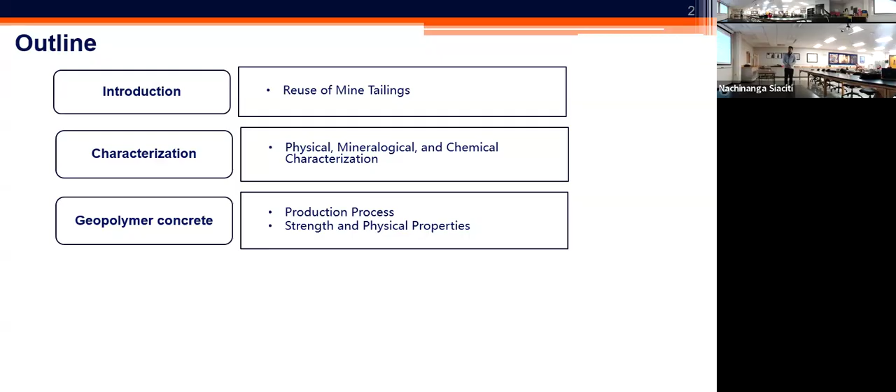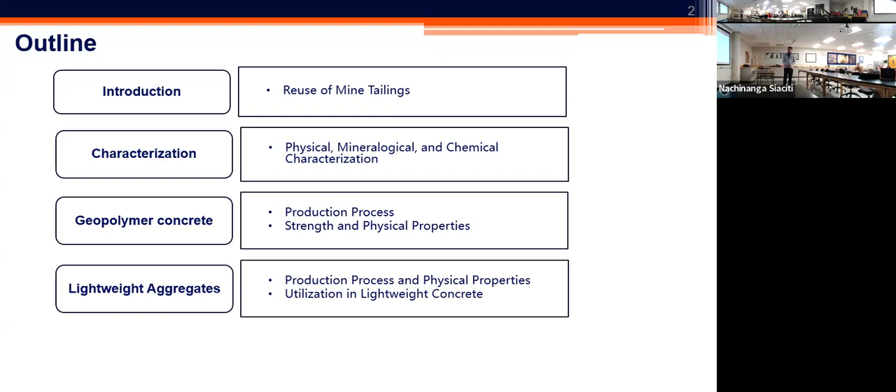And then I would like to introduce the three different techniques, mainly about the geopolymer brick. Related to that, we're going to look into the production process and the strength and physical properties of the geopolymer bricks. Then later, we're going to look into a similar process, but for a different product. We will look into the lightweight aggregate, the production process for that, and some characteristics of the aggregate, and also their use and performance in terms of the concrete made of those aggregates. And lastly, we can look into the ceramics.

Sorry, I'm told that only one button on this remote works, and it's just to advance it.

So this is a beautiful picture of Antamina mine, which is located in Peru, one of the major providers and producers of copper and zinc. This picture is a really good reminder for all of us about the importance of mining and the fact that mining engineering plays a major role in our life by providing the minerals and materials that we need for infrastructure, energy, as well as technology development.

It's projected that the need for minerals and materials will double within the next 30 years. So you can only imagine that the waste of the mining operation also will drastically increase. That waste of the mining operation, as a leftover of the operation when the material of value has been feasibly and economically recovered, is called mine tailings. And it's projected that we will even be looking at beyond 10 to 14 billion tons of mine tailings to be deposited every year. So the quantities of mine tailings are of significance.

Typically, we deposit mine tailings in two forms. What you see on the left side is the dry stacking after the water has been removed. And what you see on the right side is the slurry deposition in the impoundment lakes, where the tailings in the form of slurry get deposited behind the dams, and then they go through this process of retention. As the material is being deposited, the dam also rises. So you have this continuous building of the impoundment lake and the dam that retains the mine tailings.

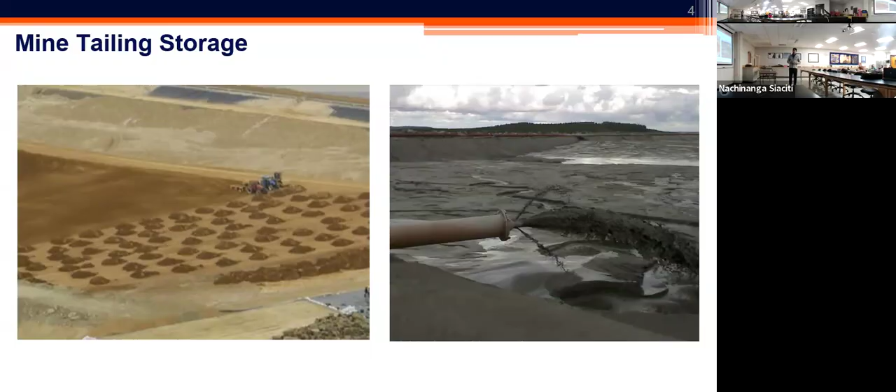Now, the handling and storage of mine tailings has several environmental, ecological, and economical issues associated with it. Some examples of these issues are shown here. What you see on the left side is a catastrophic failure of the dam that happened in 2019 in Brazil that resulted in the unfortunate deaths of 270 people and dislocation of millions of tons of tailings.

And what you see on the right side are also examples of the air pollution as well as the contamination of the water that would be associated with the deposition of the mine tailings.

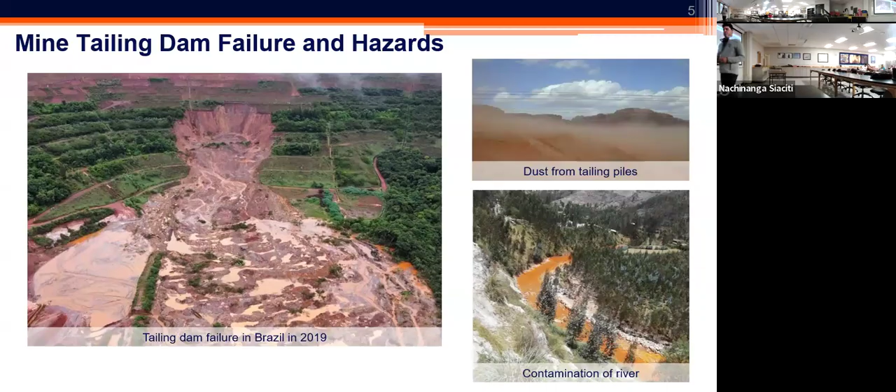So here also you can see examples, a statistical evaluation of the records of the different dam failures that have been recorded related to the tailing dams. So unfortunately, tailing dams run about 2 orders of magnitude higher risk for failure compared to other types of water dams that we have been able to work and engineer over the years.

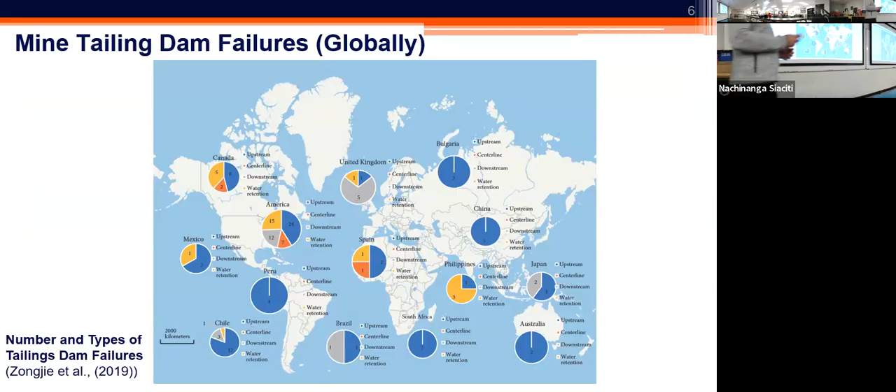So if we think of the mine tailings from the perspective of the waste and look at the waste hierarchy, obviously, often the easiest solution for us, which is also the least favorable, is disposition and disposal of the mine tailings. And at the top of this pyramid, you can think of the reuse as the most favorable option.

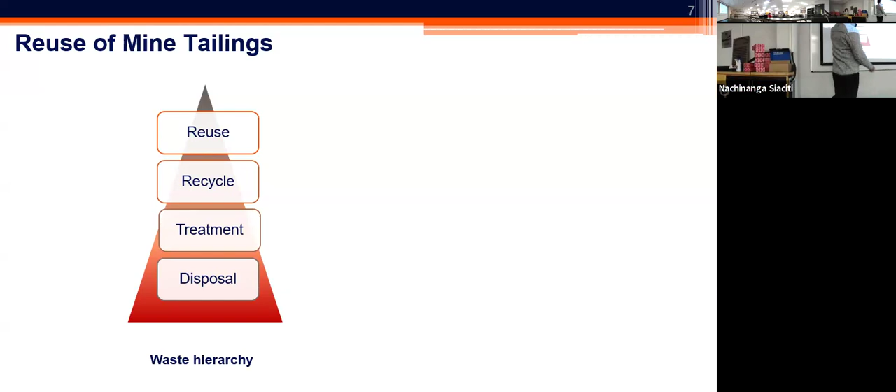And we can visualize and envision many different benefits associated with the reuse of the mine tailings. Starting at the top, we have the creation of sustainable types of materials that would then allow us to reduce the need for the use of natural resources, limiting the amount of waste production, and hopefully associated with that, we can promote additional innovation and improve the teaching and research capacities in our programs. And hopefully at the end, we can promote different industries related to the production of these construction materials.

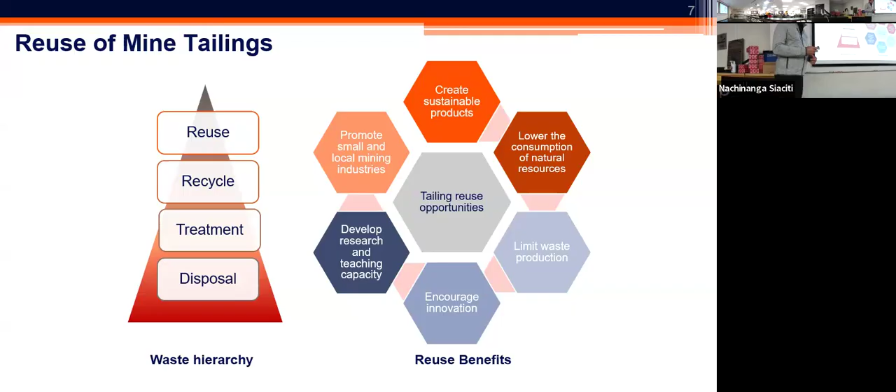Oops, let's go back to previous slide.

So as a geotech engineer, material engineer, we have some appreciation for some of the materials that come with the mine tailings. As a mining engineer, maybe the materials are considered as waste of lesser value, but if we look into the materials, they often contain higher amounts of aluminosilicates, aluminum oxide and silicon dioxide. So that essentially is a type of material that we would be looking for. So from the perspective of a material engineer, the material might have some value.

And over the last, I would say 5-6 years, in our research group, we have focused on production of different types of construction materials, mainly from mine tailings, in the capacity of geopolymer bricks, lightweight aggregates, as well as ceramics.

So also, since the start of my career at Mines, we have been focusing on evaluation of the behavior of geomaterials. So knowing a little bit about how the materials behave, how they fail, how they fracture, I feel quite comfortable and optimistic that at some point we would have larger scale application of these materials, as long as we can resolve the issues with the scaling and the higher capacity processing of these mine tailings.

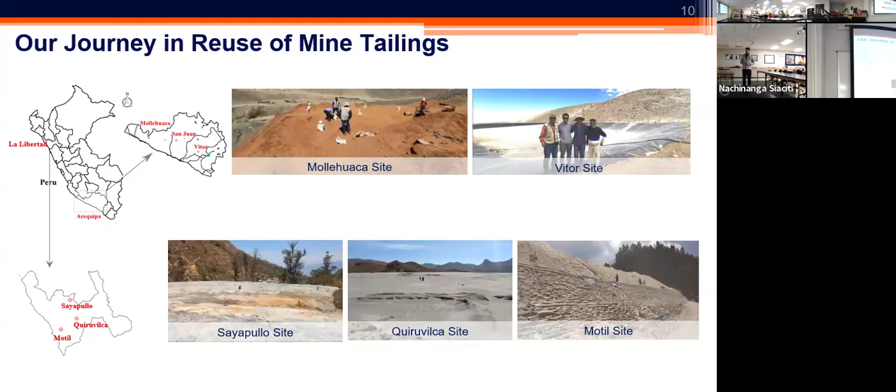So for that, we need to look into the samples. These are some images of the samples that are shown here with the gradation that we have. So gradation reveals essentially the percent finer versus the different particle sizes for these materials. One of the key sieve sizes that we like to always have a good understanding of the percent passing is sieve size 200, with a size of 75 micron.

So that essentially tells us, out of the entire assembly of the grains, how much of it is considered as technically the fines, that is the combination of the silt and clay, and how much of it is potentially sand and even larger types of grains.

So when you look at the gradation evaluation for these samples, you can realize that these have somewhere like 40 to 60% passing of the sieve number 200. So if I can use the laser option here, hopefully. Yeah, so sieve number 200 has the opening size of 75 microns. So you see that we have 40 to 60% passing of the tailings from that sieve size.

But if you look also closely at the portion of the material with the size smaller than 2 microns, which is typically considered for the clay, we don't really have too much of the clay minerals within the material. So the takeaway here is that in terms of the gradation evaluation, most of these tailings that we had the chance to work with are considered as silty soil type material, sometimes with some amount of clay, sometimes with some amount of sand, but these materials were primarily silty type of materials that we work with.

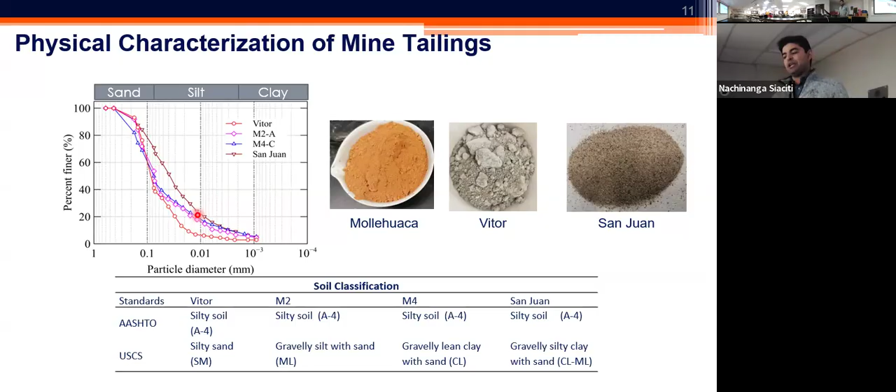In terms of evaluation of the mineralogical composition, there is a well-accepted practice where you can use the X-ray device, and by subjecting these materials to millions of X-ray patterns and looking at the reflection pattern, you can identify some of the key types of the mineralogical composition for these materials. So here, the fact that we do see a lot of peaks in the X-ray pattern can remind us that the materials are highly crystalline, and they consist of some primary types of crystalline structures.

In these samples that we had a chance to work with, we identified quartz as the dominant type of crystal. In addition to that, we also had albite and muscovite that were rich sources of aluminum oxide as well as silicon dioxide.

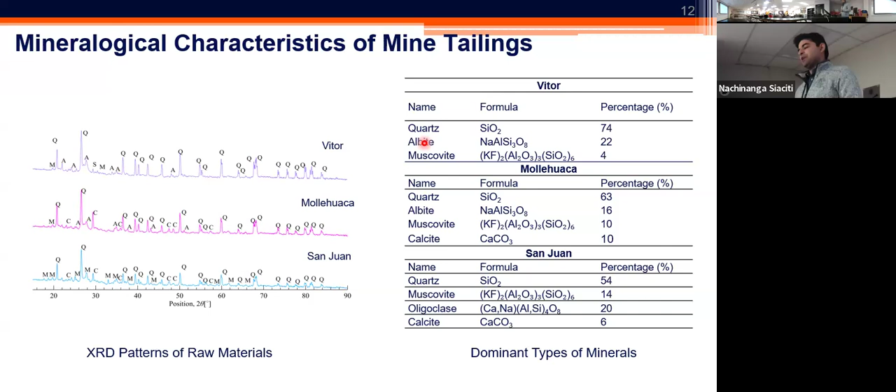In terms of the elemental evaluation, you also can quickly reveal the elemental composition by doing basic scanning electron microscope imaging with EDS. So this would not only reveal the morphology of the grains, but also the surface-based elemental composition of these types of tailings. So in the tailing samples that we had a chance to work with, we often saw that we commonly had silicon, aluminum, and iron as the dominant types of elements that were available.

So some of the takeaways so far in terms of the evaluation has been that silicon, aluminum, and iron are the 3 dominant types of elements within these tailing materials. And often you have some favorable ratio of silicon to aluminum. In fact, in these tailing samples that we had a chance to work with, the tailings were rich in aluminosilicates, and the silicon to aluminum ratio was ranging from 2 to 3.

That often is a good metric, a good predictor of the performance for geopolymerization and the success of the geopolymerization. But that doesn't necessarily mean that we always will be lucky in terms of having a good ratio of silicon to aluminum in the tailings as collected and in their raw form.

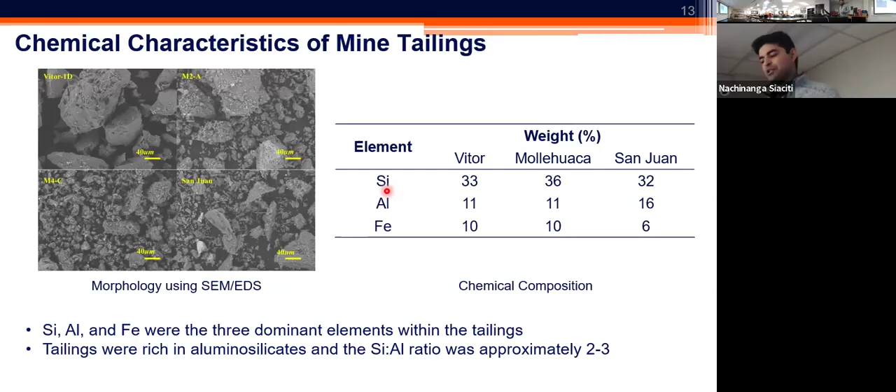So next, I would like to also show a typical evaluation of the elemental composition for some of these tailings. If we consult with the Department of Energy's designation for critical minerals and materials, we often find that from the elemental evaluation, we have some traces of those critical minerals and materials present in these tailings. So again, while being considered as waste material, we often have some traces of those materials that can essentially open up additional venues and opportunities for further extraction of value-added minerals.

But in the context of the work that we are doing, we are technically ignoring the presence of those critical minerals and materials, and we are really hoping to do something with the true waste, which in this case is the typical elemental compositions of silicon, aluminum, and iron, as you can see being dominantly present in the evaluation of the elements available within the tailings. So again, silicon, aluminum, and iron happen to be the dominant types of elements that are available.

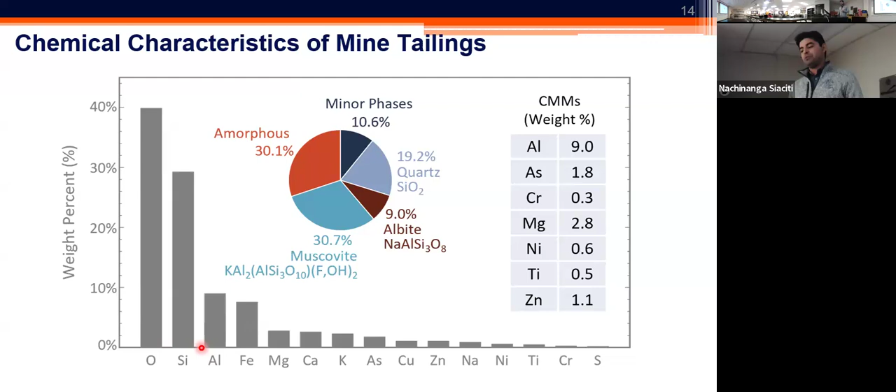So now let's look into some of the processes and the steps that are needed for the conversion of these types of mine tailings to value-added materials. So the first technique that I would like to discuss and present is geopolymer brick or geopolymer concrete production. So before I dive into the actual process, I'd like to introduce what geopolymerization means.

So we need to kind of put a little bit of a chemistry hat on so we can go through this, but I try to simplify this process. So the geopolymerization process involves the use of the precursor or the feedstock, obviously in our case the mine tailing, as material is subjected to fairly high pH environments, an alkali-rich environment, usually with exposure to solutions like sodium silicate and sodium hydroxide and the mixture of the two, you can facilitate the release of more reactive aluminum

and silicon species. Depending on the ratio of silicon to aluminum, those released species can participate in the formation of the tetrahedral units. Whether you naturally have the proper range that can immediately produce those ideal units, or you engineer the system by providing additional sources of silicon and aluminum, it is fairly easy to target different types of connections of the silicon and aluminum species.

We usually like to have a silicon to aluminum ratio of 3 and higher for the production of geopolymers. There is a trend that when you achieve those levels, the material not only will be stronger, but also more durable. So we usually favor that specific ratio. These materials then connect to each other in terms of the silicon particles, with some aluminum bonded to them, and they form monomers, connect further together, form oligomers, and then these oligomers go through the polycondensation reaction

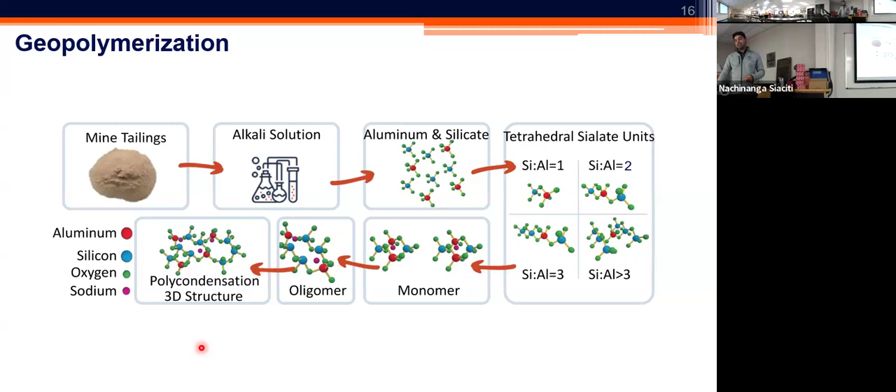So while this graph is a little bit complex and the process may look like many steps are involved, in reality, the process of making a geopolymer brick is not really any harder than baking a cake. If you think about the cake, you need flour and water to mix together and form some sort of a paste, and we do exactly the same thing. So we have the mine tailings. Sometimes you need to sieve them or grind them depending on their condition.

Then the process involves mixing the mine tailings in the solution of sodium hydroxide. Upon mixing, you come up with a mixture that can be cast inside the form with different levels of applied pressure. This material then forms these solids, which are initially deformable, but upon exposure to slightly elevated temperatures ranging from 40 to 70 degrees Celsius, you can facilitate the hardening of these bricks, which results in the formation of the geopolymers.

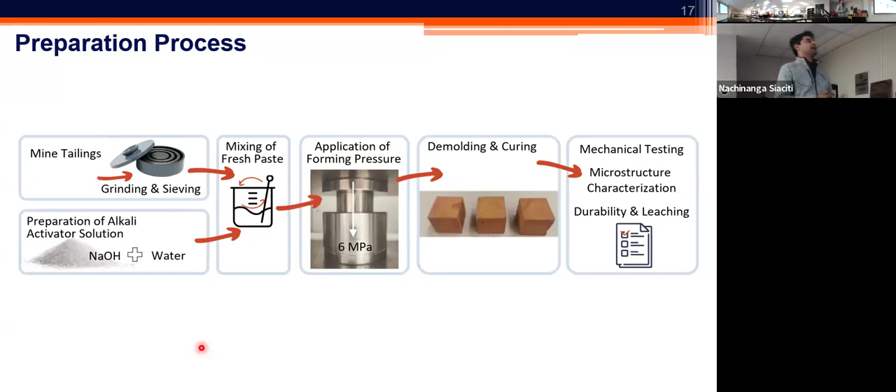Then you can proceed with the evaluation of different characteristics, including mechanical behavior, microstructure, durability and leaching performance. So like I said, geopolymerization in the laboratory, at least on the benchtop scale, is fairly straightforward and well documented. So what do we do with these bricks? The first thing is to evaluate the compressive strength. What you see in this picture is compression testing, where these bricks are placed between the platens and subjected to uniaxial compression, and we document their performance.

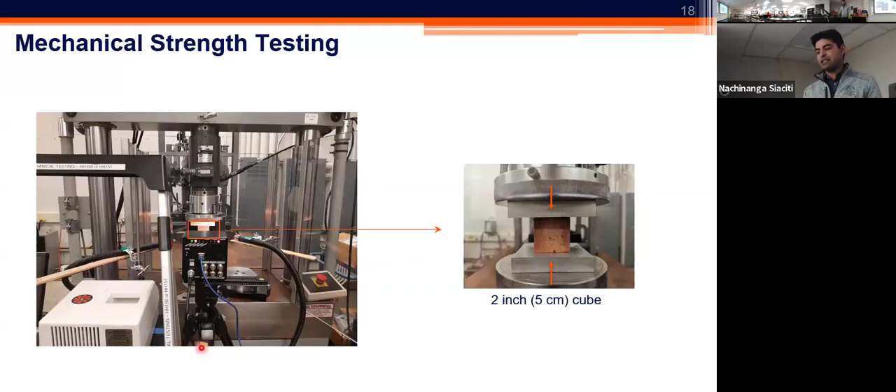We found that the strength achieved is highly linked to the molar concentration of the activator, in this case the sodium hydroxide activator. What you see here is a typical trend: with an increase in molar concentration, we often see an increase in compressive strength. The strength can be as high as, as shown here, 4,500 PSI or 30 MPa. Right now in our laboratory, we are seeing strength levels almost 3 times these values. But the success highly depends on the mine tailings and the kind of aluminum silicate species available.

But what if we geopolymerize the material with an insufficient molar concentration or chemical type of activator? If we do that, as shown here, we not only get lower strength, but the mine tailings remain in their original form. So when the sample breaks, you see those powderized mine tailings still there. But with sufficient geopolymerization, the material no longer looks like the original raw form. In fact, you start to see a concrete, brittle-like material, visible in these images.

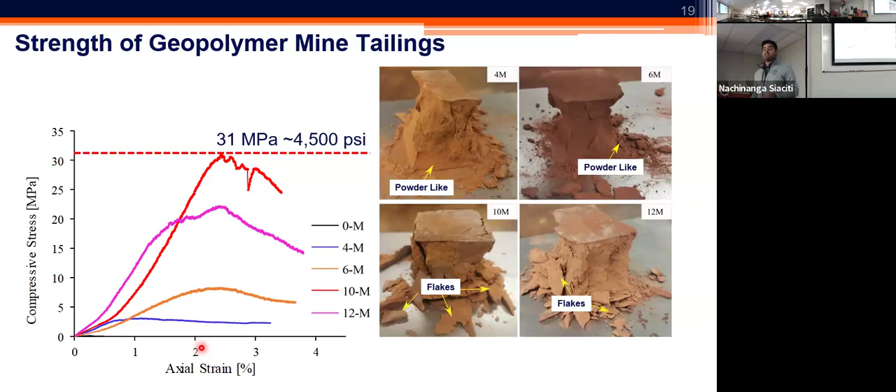So the next step in terms of the evaluation has been to see if we have this consistency in terms of the behavior for this material. So we did a lot of testing for many of these mine tailings and realized that the strength that we were getting was not sufficient. So then we went back and looked at the elemental composition, realizing that in some cases the silicon to aluminum ratio was not necessarily favorable.

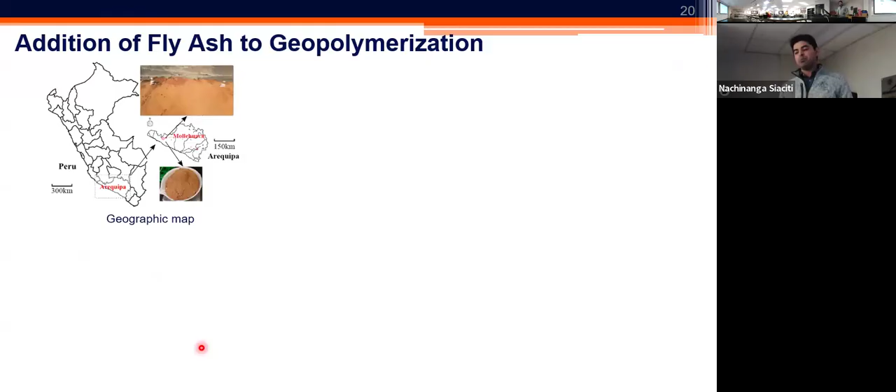So by simple mixing of the solid content of the mine tailings and the fly ash and repeating the process, you would have an opportunity to produce new geopolymers that hopefully would have some improved performance and characteristics compared to the tailing-only based geopolymers.

So we did that. We evaluated the mixture of the tailings and the fly ash in different percentages of addition of fly ash. And I think we went up to 20% addition of fly ash while still maintaining that high percentage utilization rate of the mine tailings. So with the 20% fly ash addition, we had 80% of the tailings that were used in that production process.

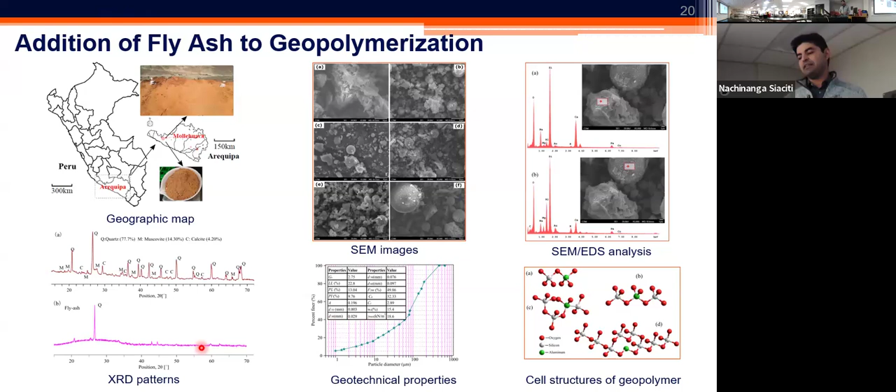And by the way, I should have mentioned that the curing process is usually 1 week long. So we put the samples in the oven, first at 40 degrees Celsius, followed by about another 7 days of curing at 70 degrees Celsius. So that's what we did for these steps that are shown here.

So one can argue that, well, if you get 15 MPa of compressive strength, that's probably insufficient. But as long as you can hit consistently 20 MPa and higher, ideally higher, then your geopolymerization has been successful for the purpose of the brick manufacturing.

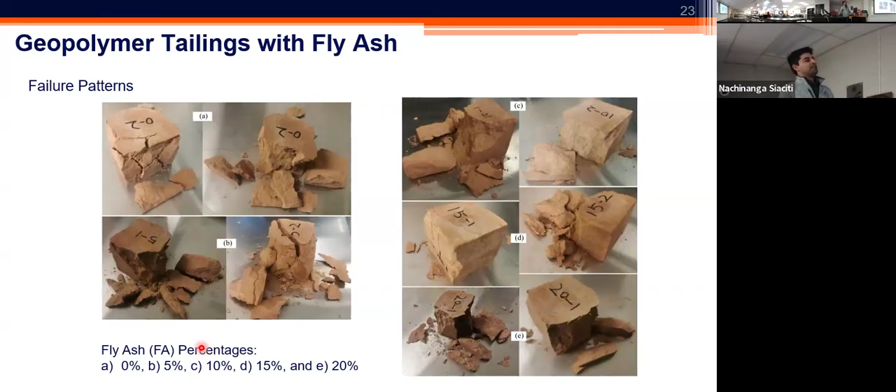And then we looked into the process as to why the additional presence of the fly ash, let's say the 20%, didn't really make much improvement in the properties. And we realized that as we exceed the 15% fly ash, any additional amount of fly ash just simply remains inert and intact and untouched, and does not necessarily contribute or participate in the geopolymerization reaction. So any amount of the unreactive content even from the fly ash can necessarily be a bad thing, maybe because of the fact that you are incorporating fly ash as a commercially available type material.

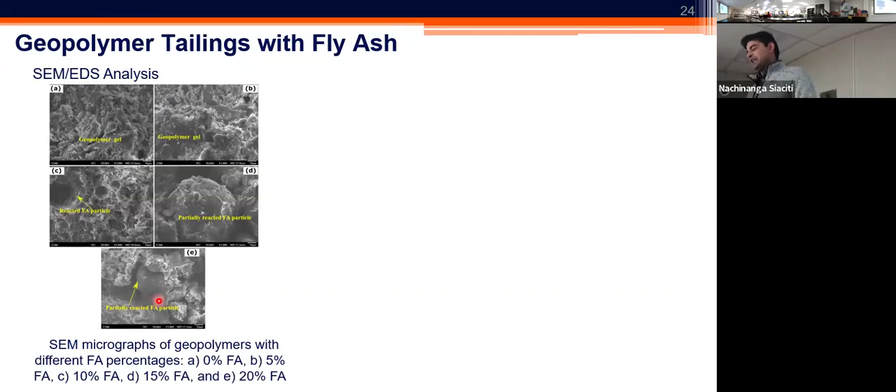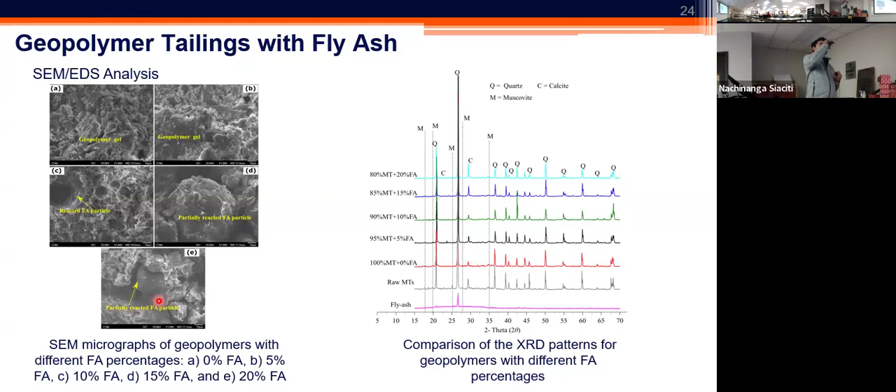All right, so, but evaluation of the behavior of the material would not be complete only after we do the compressive strength testing. In many cases, it's very important to evaluate the behavior of the material and the resistance to fracturing. So that is a type of test that we consider as a fracture mechanics type testing. If I want to find an analogy to this, it's like that little chip that you get on your windshield, and you ignore that chip, and eventually after maybe a season of the winter and then wetting and drying, that chip starts to grow and turns into a big crack, right? So that tendency for the chip to become a major crack is related to the tendency of the material to resist the fracturing or allow for the fracturing to happen. So we can evaluate that resistance or tendency by intentionally performing fracture testing.

So what we did in this scenario, we did the 3-point bending test on semicircular specimens. These specimens were cast the same way as before. We put them on 2 rollers and then we apply the load at the top. This facilitates the formation of the mode 1 fracturing from the tip of the existing notch. So think of this notch that we artificially introduced in our sample as like your windshield chip. And that's the point of concentration and initiation of the cracking. With this mode of loading, we can promote the fracturing and evaluate how much force it takes, and what the characteristics of the fractures are as they're generated. So we did also apply a technique called digital image correlation.

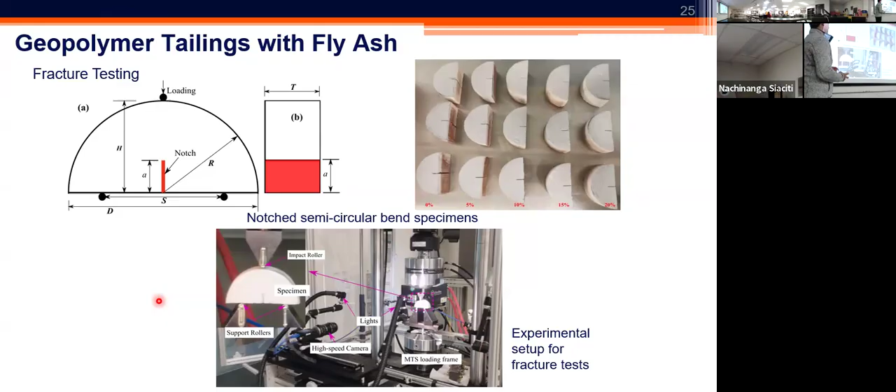So the beauty of the digital image correlation is that you can have a camera that is mounted on the testing setup quite far, in fact, in some cases intentionally far from your object with no physical touching or contact between the camera and the object, but then you can take images of your object, feed them into a software, and then based on the minute changes that can be only observable to the algorithms implemented in the DIC, you can get a full profile of displacement and strain for your sample.

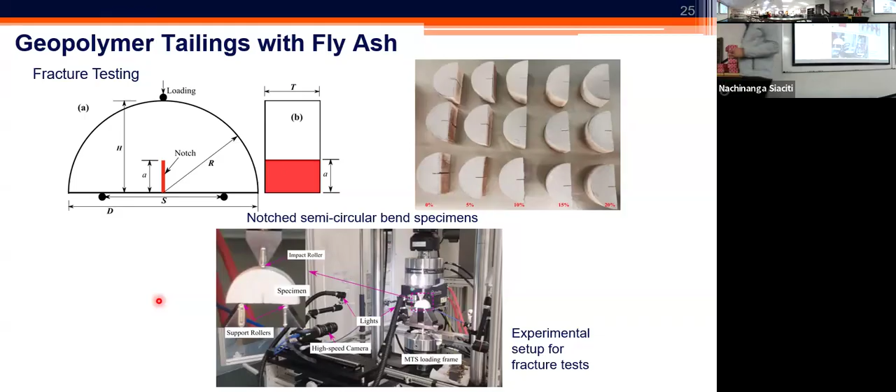So that allows us to get a full picture of the deformation pattern for the sample without even touching the sample or installing any type of sensors on the sample. So it's truly a non-destructive way of evaluating the characteristics of the fracturing for the material.

So in that case, we noticed that with increasing the amount of the fly ash, the force or the fracturing levels were increasing. And if we apply the fracture mechanics concept and get the mode 1 fracture toughness for the material, we did notice that with the increase in the fly ash content, we have had naturally an improvement in the fracture toughness values for these materials.

We did compare these values with the fracture toughness of concrete and realized that the fracture toughness values were also pretty similar and within the same range as a normal concrete. So we not only met the compressive strength of the concrete, but also achieved a similar level of fracture toughness, like the concrete material, in our geopolymer bricks.

But having evaluated the fracture behavior, while important, was still not sufficient, because in many scenarios, we would hear from mining industry folks that they are often concerned about the potential for these materials to leach out some of the heavy metals and contaminants. So let's say you make these bricks and they're looking pretty nice. 10 years from now, they start to fall apart and you have all of this hazardous content that is getting released. So we were quite interested in evaluating that as well.

But before I show you some of the results, I'd like to again make the point that in some scenarios, your mine tailing in the original form may only give you fairly low levels of strength for your geopolymer bricks, maybe in the order of 10 megapascal, but it may only take 15% of different types of waste to be supplemented with, for example, metakaolin, fly ash, and slag.

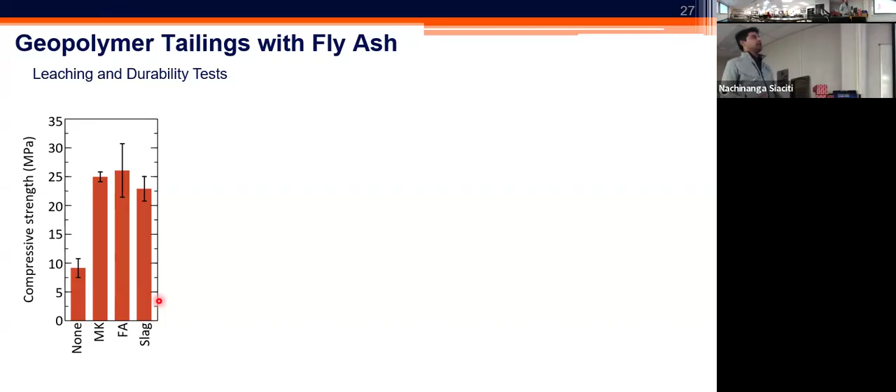So what did we do to better evaluate the potential for immobilization of the heavy metals and contaminants? Well, as you can imagine, a typical test would be to submerge the samples inside a container and keep tracking the amount of leachates for a longer period of time. So in this scenario, we did testing for about 63 days.

Every single day, we collected samples of the leachate, sent it to a laboratory, evaluated the ICP and the elemental composition of the leachate, and then fed it to some models to evaluate the parameter known as the leachability index. There are several standards, mainly written by Canadians, that consider the successful and safe reuse of materials when this leachability index is 9 or higher.

So we did confirm that for many of the heavy metals and contaminants that we had in our tailings, the leachability index was in fact sufficiently high. I would still think that according to the standard, a value of 9 or higher would be considered as required. I should mention that arsenic was one of the few contaminants where we reached a value of 8 to 9. So additional work definitely is warranted to make sure that the material would in fact achieve a higher leachability index when tested in this scenario.

So that was essentially a summary of the work that we have had so far, but we are working towards additional larger scale production of these materials.

So if you look at the industry and the practices, you realize that for the brick to be made at the larger scale, you need to have a big extruder where you can extrude the material at large capacity. We are looking at thousands and tens of thousands of bricks to be made on a daily basis.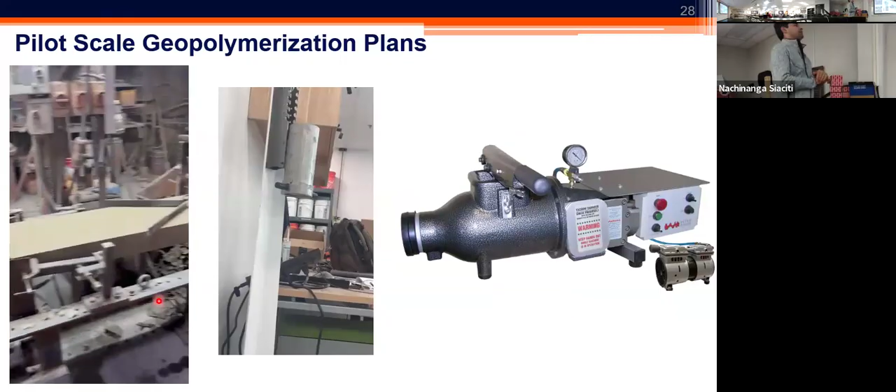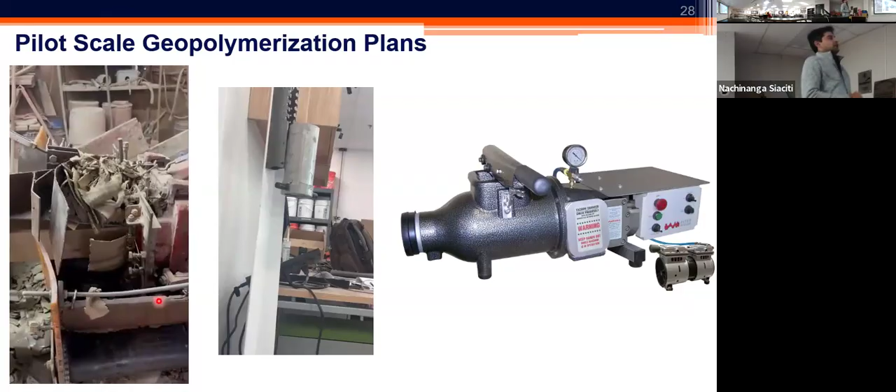So obviously the process that we have at the laboratory is not really scalable, but we are looking into some alternative solutions where we can essentially develop an extrusion-based technique for the production of these bricks at a later time. So that's essentially what we are focusing on, in terms of improving the surface texture and the extrudability of the material.

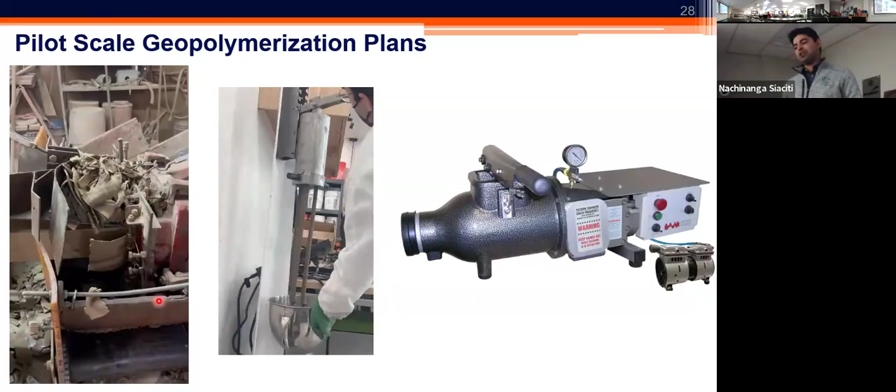So, a quick overview of how the material can be optimized in terms of extrudability with some really basic tools and techniques, but obviously additional work is needed to make the material really smooth and hopefully scalable at some point. The next type of technology that I'd like to introduce briefly is the lightweight aggregate production.

For this type of materials, we are looking into, again, the use of the mine tailings as much as possible, but now it's a slightly different process where we would like to make aggregates for potential use in concrete. So in this process, lightweight aggregates are important for our industry. We use them in several different application areas, mainly for production of structural lightweight concrete.

You may ask, what are the motivations for the production of structural concrete with lightweight aggregate compared to normal weight aggregate? Well, the primary reason is the cost as well as the density or unit weight of the concrete. Imagine a high rise where significant quantities of concrete are poured and placed. If you can lower the density of your concrete by 30–40%, that should translate easily into a smaller, cheaper foundation.

In addition, lightweight concrete has superior characteristics in terms of soundproofing as well as thermal insulation for your buildings. That's the primary reason you can see in the market the general rise in demand and market size for structural lightweight concrete. Since 2019, the market has been valued at almost $40 billion. We are on track to hit $60 billion in just a few years.

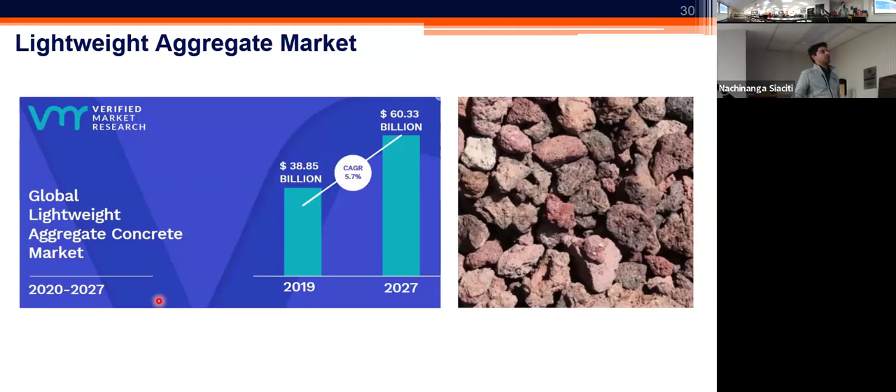Talking with different producers, one of their major pain points is that of the total cost of these lightweight aggregates, almost half goes to covering utility expenses. So these are fairly expensive, environmentally unfriendly materials. So we had this motivation, and as the first research group, we started to look into the production of aggregates from mine tailings.

So with a small tweak in our process, where we are still using the alkali activator by simply spraying it on the pelletizer, we were able to produce the aggregates in the form of pellets that then undergo the curing process and incorporation into the concrete.

The chemistry is fairly similar for this whole process, where the mine tailings are often mixed with some additional supplements, then mixed with the sodium hydroxide solution that gets sprayed on the pelletizer, and the material then goes through a curing oven, leaving you with a cured, ready-to-use lightweight aggregate that can be incorporated in the concrete.

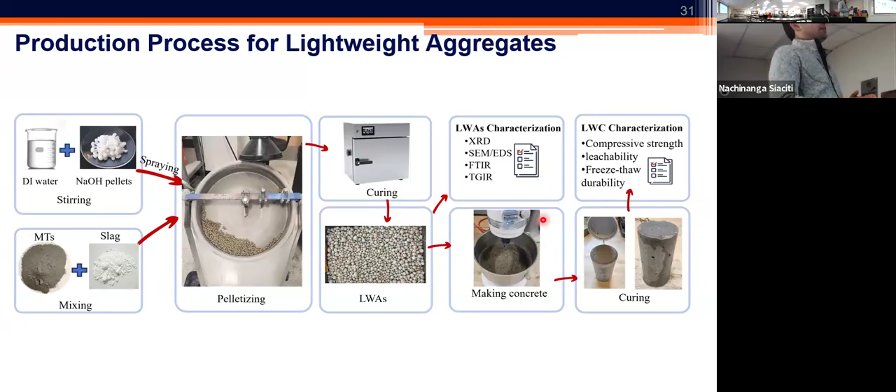So one of the key questions we had was, first, are these aggregates of sufficiently high strength to be utilized in concrete? Second, how does the concrete behave using these aggregates as the primary coarse material? So again, another view of the pelletization. You can see here that the spraying is being done on the pelletizer.

In this case, the material is granulating. And then if you give it sufficient retention time, the material can then sufficiently pelletize. I do need to note that this pelletization process that we follow is not necessarily adoptable at the industrial scale. We know that the big pelletizers in the large scale need to only operate for 3 to 4 minutes. We call this time the retention time. So your material, dumped into the pelletizer, after 3-4 minutes needs to exit the pelletizer.

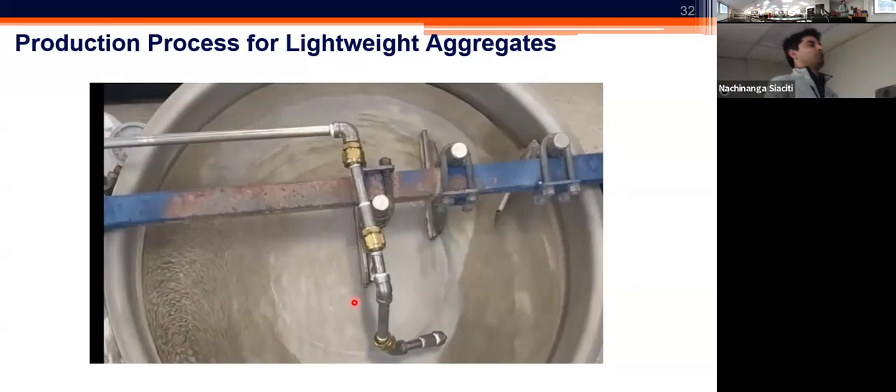So our process currently lasts about 30 minutes. So we need to do more work so we can improve this process. But at least the fundamentals are there where we can see the production of the lightweight aggregate in that sense. So what we did was to document the characteristics of this aggregate and then incorporate them in the matrix of the concrete and then proceed with evaluation of the concrete characteristics.

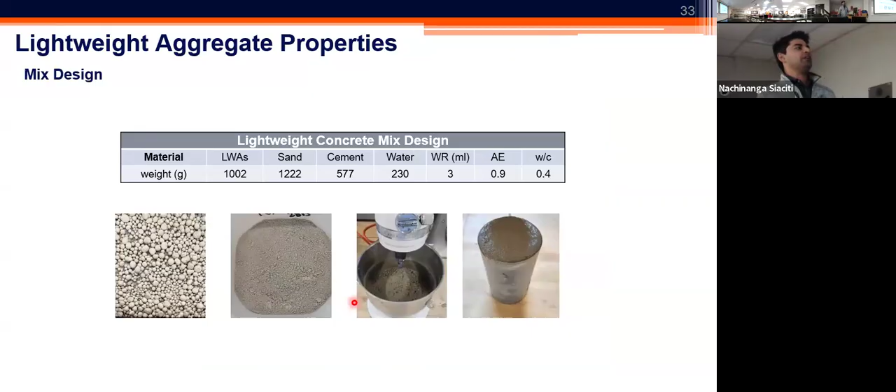We did this by coming up with a basic mix design for the concrete, added the aggregates, and then came up with these cylinders. After curing, we proceeded with the testing of the compressive strength of these cylinders. There are existing ASTM standards that require us to hit a minimum of 28 megapascals at 28 days for this structural lightweight concrete. We did achieve 44 MPa using the tailing-based aggregate.

So we were comfortable in the sense that the strength was achieved fairly easily, but we also were concerned about the potential freeze-thaw damage, especially imagine if you're using this lightweight aggregate in Colorado that would be subjected to freeze-thaw cycles. So we wanted to see how the freeze-thaw may potentially affect the performance of these samples. So we made some beam samples, put them into a chamber, and then exposed them to freeze-thaw. This test involves applying 300 cycles of freezing and thawing.

And by doing so, you can evaluate the degradation in the dynamic modulus of the material as a measure of the damage. And as long as your new dynamic modulus is at least 70% of the starting point, then the material can be considered as successfully passing this test. So we did this type of testing, and to our surprise, the value of the reduction was only about 10%. So we retained 90% of the original dynamic modulus, therefore considered the tailing-based aggregates as successful.

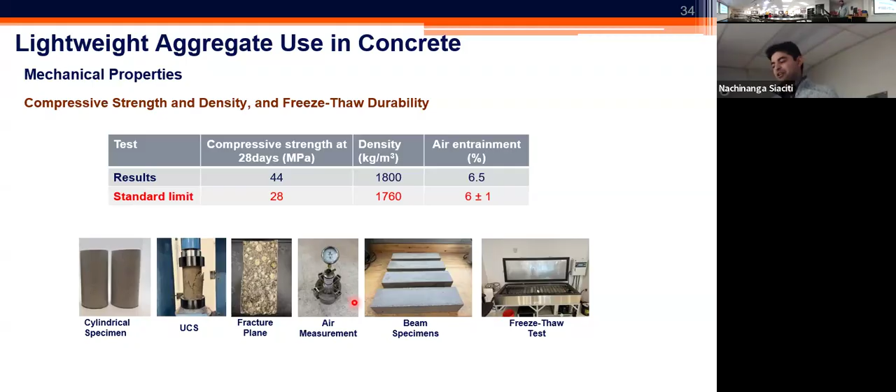And to our surprise, the control samples that we made from commercially available lightweight aggregate all failed and crumbled by the end of the test. So we even had some bragging that tailing-based aggregates were superior to those commercially produced lightweight aggregates that you could buy from some of the nearby facilities. So that's essentially the evaluation of the aggregate, but obviously more work needs to be done so this can be adopted at a larger scale.

And right now we are also evaluating another type of innovative approach where instead of using an alkali activator solution, we are simply using existing cementitious materials, starting with Portland cement as the cold bonding agent. So my student Amin is here. If you have any questions about the cold bonded type aggregates, please ask him, as he has been working on the challenge of producing aggregates that would also be lightweight for structural application.

It's a fairly similar process, but we believe that this would also have potential for adoption because first, you don't have any need for an alkali activator, which is generally a hazardous type of material. Second, the process of spraying is fairly simple, and you're just spraying water onto an already mixed solid powder of the tailing and the cement. And we have gotten some encouraging results using only 30% cement, still 70% of the tailings used for this application process.

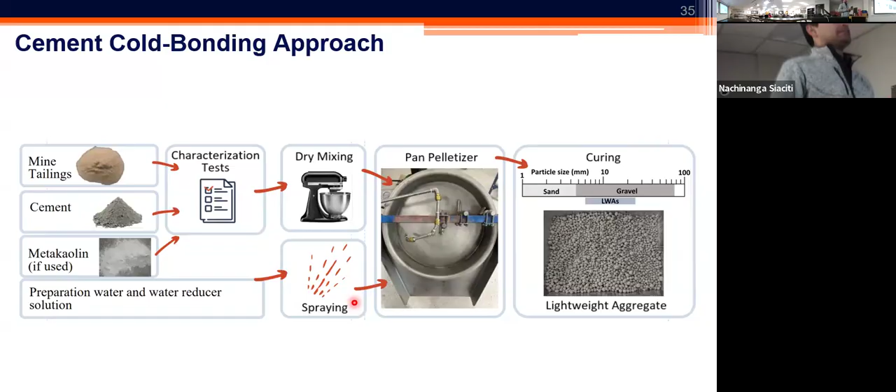And lastly, I'd like to say a few words about the core technology around ceramic tile production. So ceramics are a type of material developed based on the sintering of the original raw material, which needs to have rich contents of different types of minerals and components, but we generally think of feldspar, metakaolin, as well as silica as the primary raw constituents. For ceramic manufacturing, they often need to be finely ground and finely reduced in size.

So first, you need to extract the material naturally. Second, you need to grind and pulverize the material. And then you need to mix it with water, put it into a forming application or extrusion, and then sinter the material.

So one of the motivations we had was that, first, tailings often have, either in their sole form or in the blended form, all of these constituents that we like and need for ceramic manufacturing. And second, tailings are already finely powderized material. So you not only eliminate the step of extraction, but also you can save money in terms of the need for grinding your material because it's already powderized.

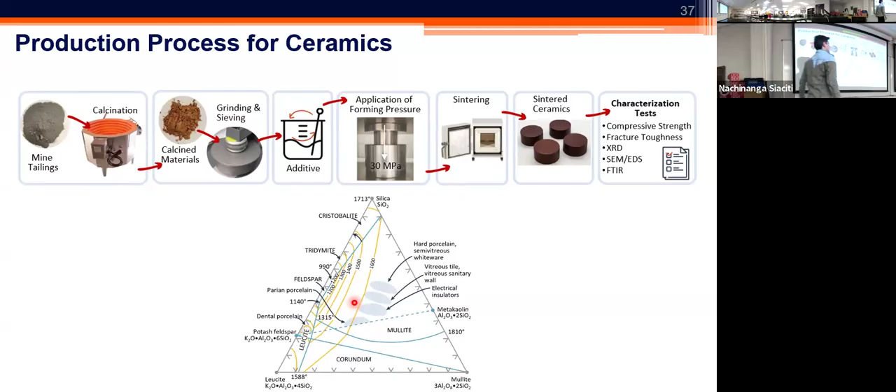So all you may need to do is to further grind it as needed, and then remove some of the barriers like the sulfate content, and then proceed with the grinding and addition of the lubricants, application of the forming to come up with your green ceramic to then go into a sintering oven, and then eventually you will have your sintered ceramics. And you can proceed with evaluation of different characteristics for these materials. So that's exactly what we did.

One of the key questions when it comes to sintering of the material is the temperature at which you can apply the sintering effect. So we did explore different temperatures. Here we had starting with 1,000 degrees Celsius all the way to 1150. The challenge was to identify the optimal temperature for successful ceramic production that would provide the highest density as well as the lowest porosity.

So if you do a comparison among the different temperatures that we explored, clearly you see that 1100 was the best performing because it provided us with the highest density as well as the lowest amount of porosity for these materials. So we adopted that for the production.

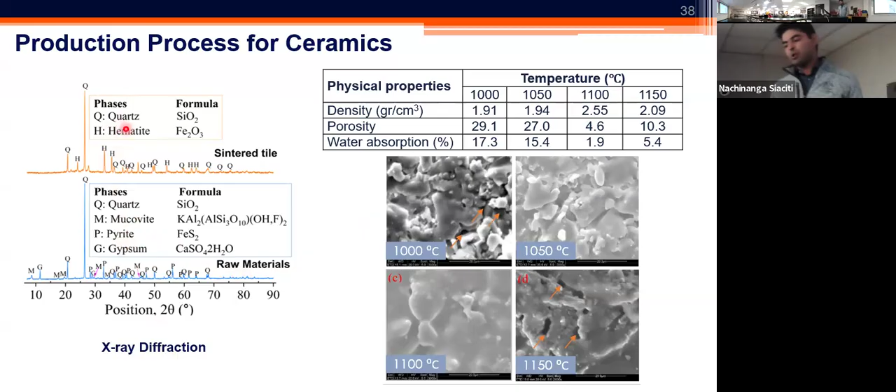We also confirmed through the X-ray diffraction evaluation that the raw materials, in fact, the muscovite, pyrite, and the gypsum, were all transformed into a new phase known as hematite through this sintering step. So they were no longer present in the original form, and hematite was formed in addition to the quartz for all these materials.

We were also interested in evaluating, in addition to the strength, the fracture behavior of these materials. So we did fracture testing, again, using semicircular bend geometry, and confirmed the fracture toughness for these materials and looked into the size of the fracturing. Again, the beauty of digital image correlation is that it provides you with the entire profile of the strain and the deformation on the surface. So by doing so, we were able to document and confirm that these tailing-based ceramics also had successful and similar fracture behavior to sintered ceramics from natural resources like sand and clay.

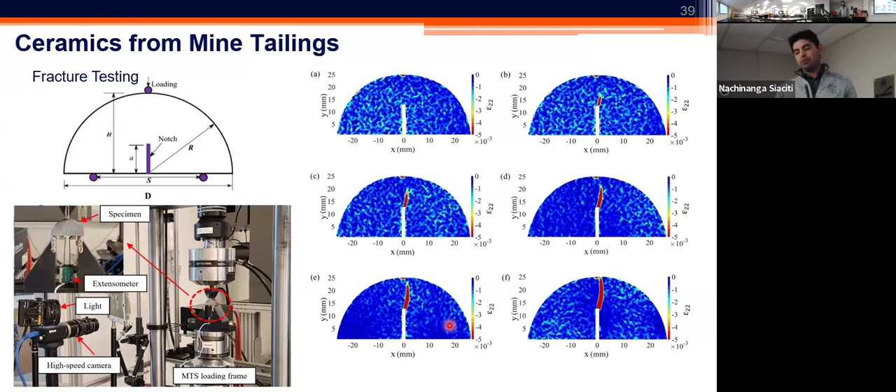And yes, so that's essentially where the research stands at this point. So we are hoping to find ways that we can take this to a next step and be able to apply the same methodology at the larger scale.

And also in addition, we are working on developing some supplementary cementitious materials from mine tailings, again, because of the presence of the aluminosilicates. Sometimes all you need to do is to finely grind your tailings and incorporate them in the structure of the concrete with the hope that you would have tailing-based concrete additives that would facilitate better formation of the cement hydration products and improvement in the durability of your concrete. So that's another track that we are working on.

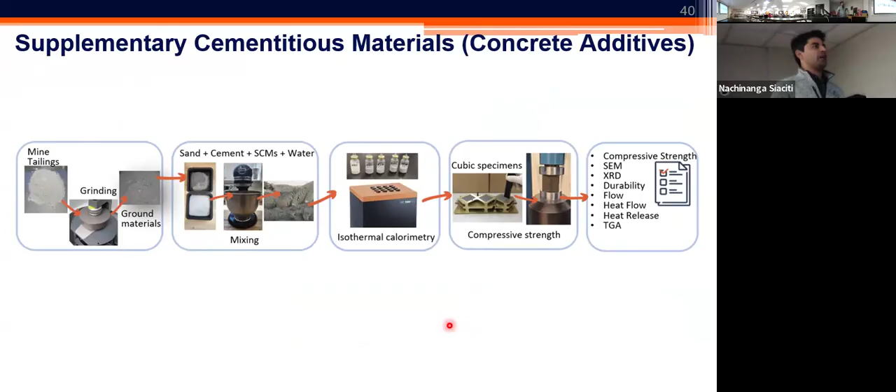So if I want to summarize some of the major takeaways, it would be as follows. Mine tailings rich in aluminosilicates can be activated and converted to different products, including geopolymer concrete, brick, lightweight aggregates. The produced geopolymers often show high levels of strength, and sometimes they are deficient in terms of the amount of the aluminosilicate species. So it would be important to adjust that with the hope of achieving a better structure for your geopolymerized material. We showed that the lightweight aggregates are also viable to produce, and they can meet the ASTM standards for even structural applications.

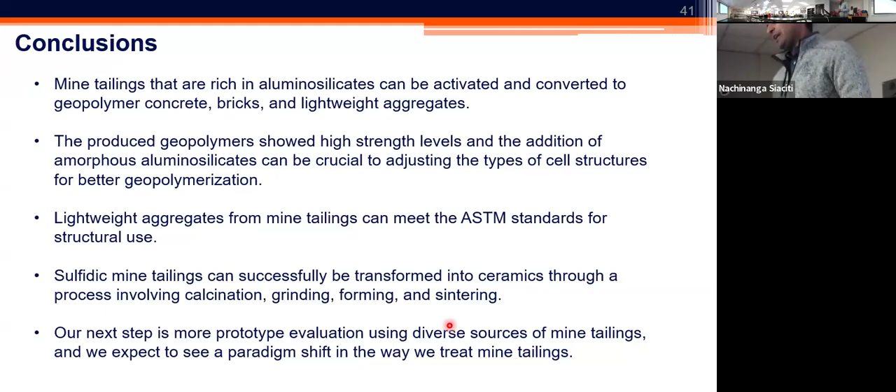In some scenarios, sulfidic mine tailings can also be successfully transformed into ceramics, but that process requires us to get rid of the sulfate, maybe through a calcining process, then proceeding with the grinding, forming, and sintering of the material. And we are hoping to expand our research portfolio into the additional steps that would allow us to explore the larger scale production of these. Eventually, we are hoping that we would see a paradigm shift in the way that we treat and process the mine tailings.